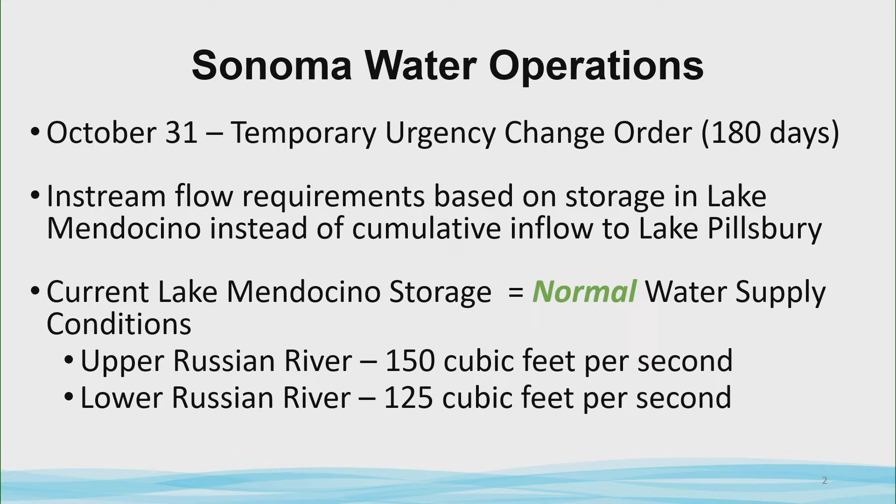So instead, more correctly, they utilize the storage in Lake Mendocino during this time. No surprise, there's plenty of channel inflow going into the Russian River right now, so they are operating under normal conditions for the water supply this year. As of today, that gets revisited every month under the order, which requires that they maintain 150 cubic feet per second in the upper Russian River and 125 in the lower.

In terms of storage in Lake Pillsbury, as of today there is about 64,500 acre feet of storage, well above their target storage for this time of year. They continue to operate under the same conditions they've been operating under the last few years, as you can see, with the exception of the blue line there, which was 2019.

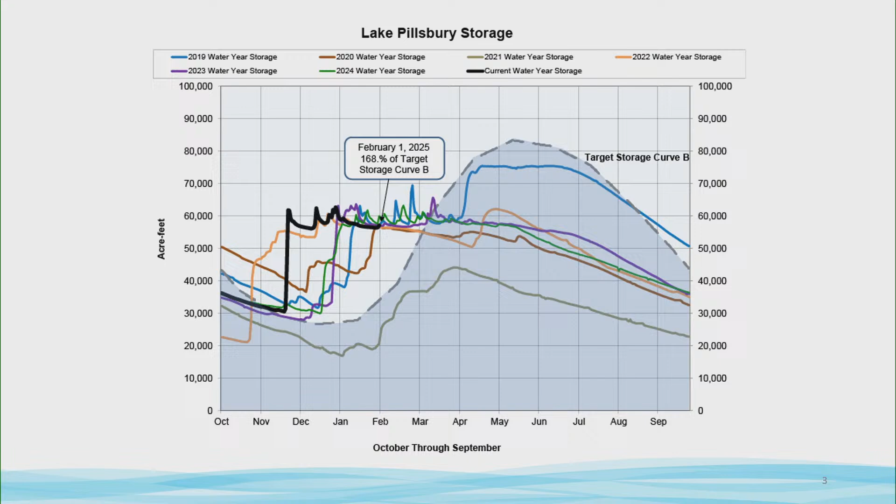For the past several years, they have not been able to operate the slide gates, which would allow them to store an additional 20,000 acre feet of water in the spring. You can see the curve changes there in terms of the target storage supply curve, related to some seismic issues at that dam that have changed their ability to store that water. So we don't expect any additional water being stored there beyond the levels you're seeing at a maximum today.

In terms of Lake Mendocino, storage again is well above the forecast informed reservoir operations pool. As of today, they are seeing storage of about 90,800 acre feet. That, of course, means the Army Corps has taken over decisions a while ago, dating back to the end of last year, in terms of managing releases for flood control purposes.

They made about 24 hours of releases on the 31st last week, and it's very likely they'll again manage releases in both Lake Mendocino and Lake Sonoma this week, later on, probably this weekend as well. So expect that they're going to have to draw that back down to get back under that flood control storage pool level.

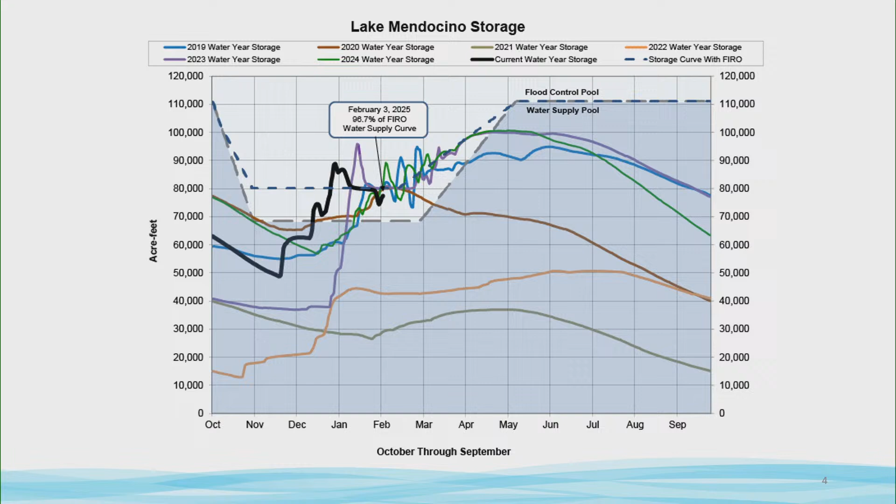Lake Sonoma, where we get our water supply, is also very, very full. Notably, if you look at the top dotted line, later on in March, or towards the end of this month, they'll start being able to store additional storage, up to a maximum amount of 19,000 acre feet. They're already pretty close to that. As of today, they're at 284,500 acre feet above the FIRO storage pool. So again, it's likely they'll have plenty of opportunities to maximize carryover storage this year as well.

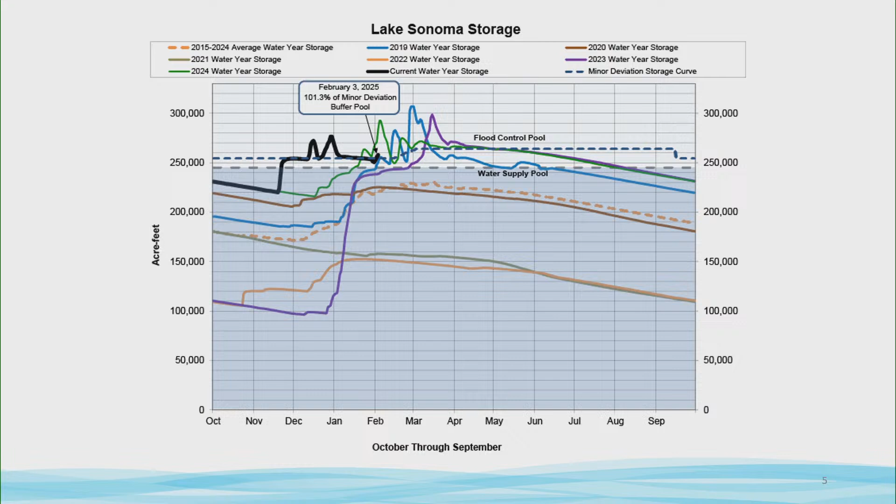I wanted to highlight a substantial outreach effort we're doing right now, a regional effort between the Sonoma-Marin Saving Water Partnership. We kicked off the Dye Tab Challenge, which runs through March to coincide with Fix a Leak Week. We'll be sending out bill inserts, and there's already lots of social media that's kicked off. Essentially, we're asking customers to take the Dye Tab Challenge, where they request dye tabs to test for leaks in their toilets, and they can enter to win a $25 gift card.

This is an outreach effort project going on amongst all the partners in the Sonoma-Marin Saving Water Partnership, but Santa Rosa is participating as well, and we've done this in the past and gotten quite a few opportunities to partner with folks on fixing leaks in their houses, so it works.

Just to provide a good news update on our grant-funded programs for direct install of ultra-high efficiency toilets, we're getting close to 100% completion of the phase 1 project, funded through the budget process in 2022-23 from the state. That was a $1.5 million ask that we received for the program.

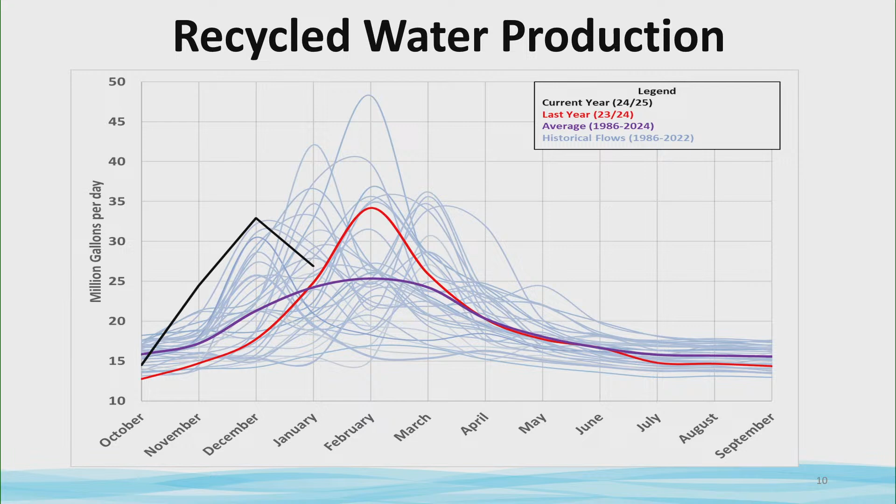Due to dry weather for the month of January, plant flows have dropped, but with this recent rain event, we expect flows to increase to 40 to 50 MGD range. This increase in production is caused by the wet weather we have had since the late fall of 2024.

This next slide is a recent snapshot of the recycled water curve. As a reminder, the red line is this year's storage level as of October 1st, 2024. The gray line is the average levels, and the black line is last year's levels for comparison. This year we received significant rainfall in a short period of time, so this has increased our storage levels about 300 million gallons above average for this time of year.

With storage levels very high for this time of year and with more expected rain, staff have decided a discharge, which I will discuss later in the next few slides.

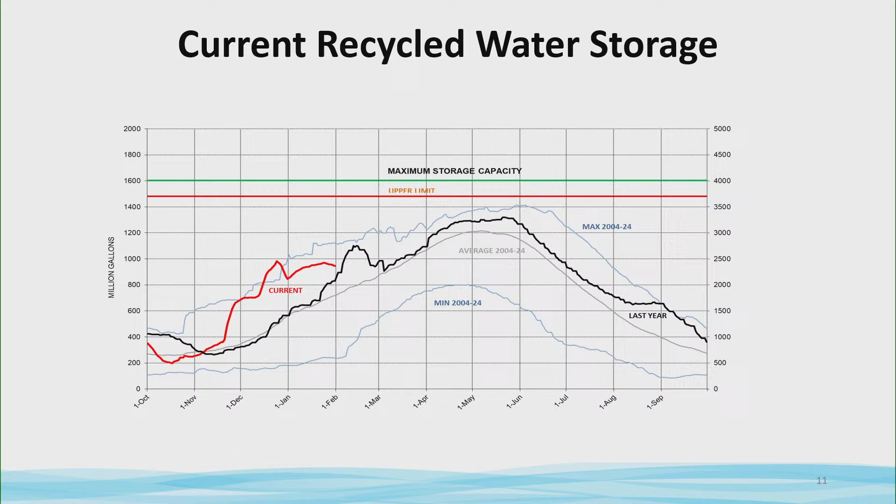This graph shows our discharge trend. We don't have all the data available for this water year's expected discharge shown in the gray because we are still in the middle of winter. However, we are currently discharging another 300 million gallons.

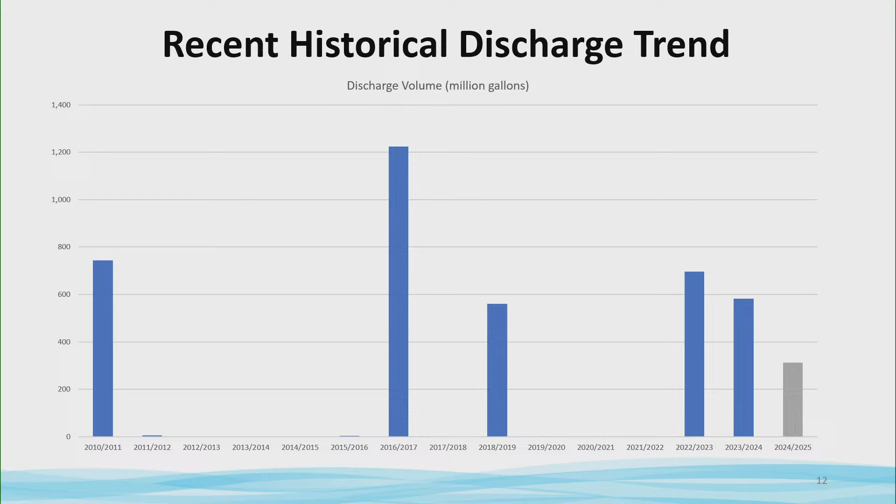This is in addition to the 300 million gallons that we discharged in the end of December 2024. Therefore, we expect to see the gray bar reach the 600 million gallon level on this graph. Furthermore, the last 3 years have had significant rainfall, which has led to discharges, but this is great for the overall region.

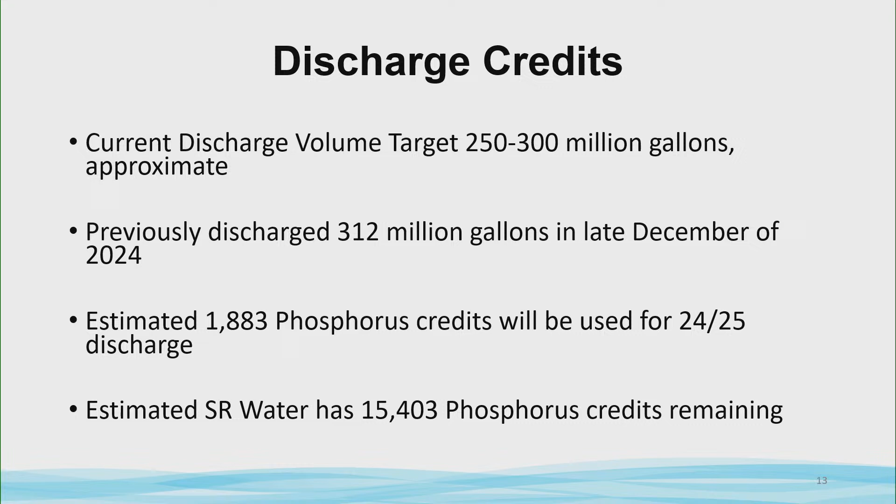Yeah, we need the 2 feet of freeboard. So our upper limit is our operating level, and the max is the max - that's where we don't want to be, because that's where you could spill over the overflow. Thank you.

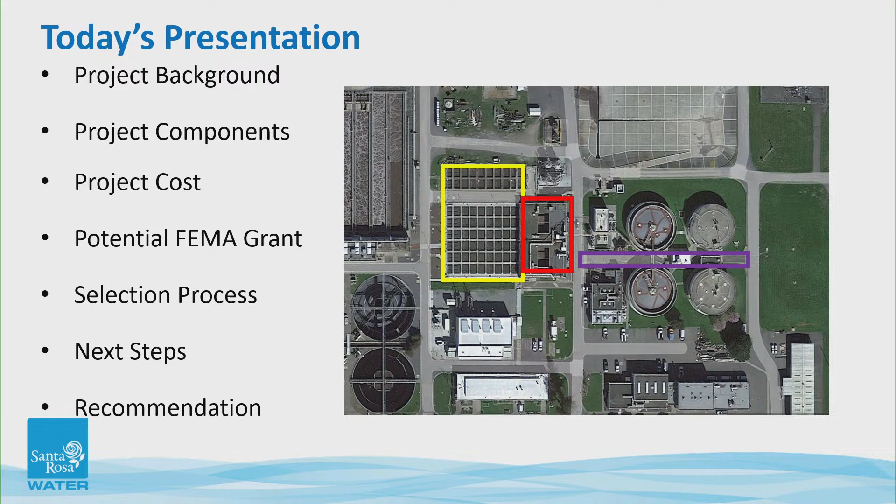So for the project background, I'll go over the headworks function and what the project is about. Our regional treatment plant treats wastewater from Santa Rosa and regional partners. The treatment process starts at headworks, where all flow enters the facility via collectors at approximately 40 feet deep.

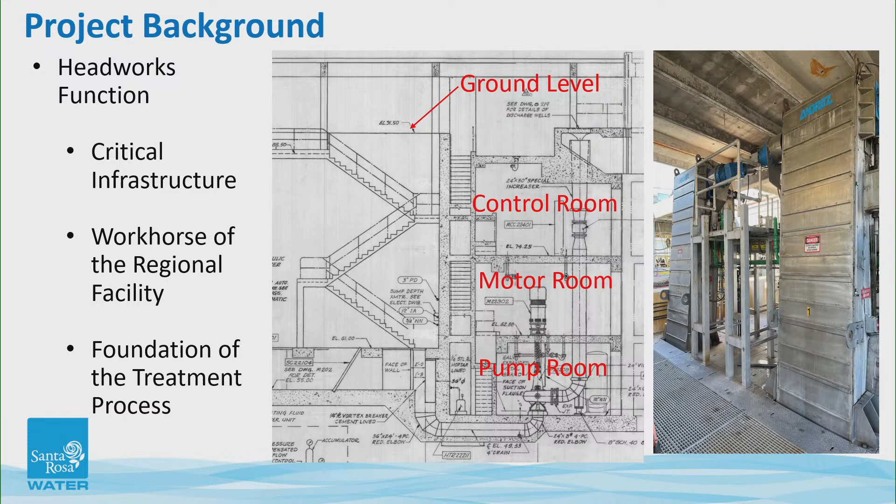As you can see, the headworks is a very critical infrastructure. It is the workhorse of the regional facility and the foundation of our treatment process.

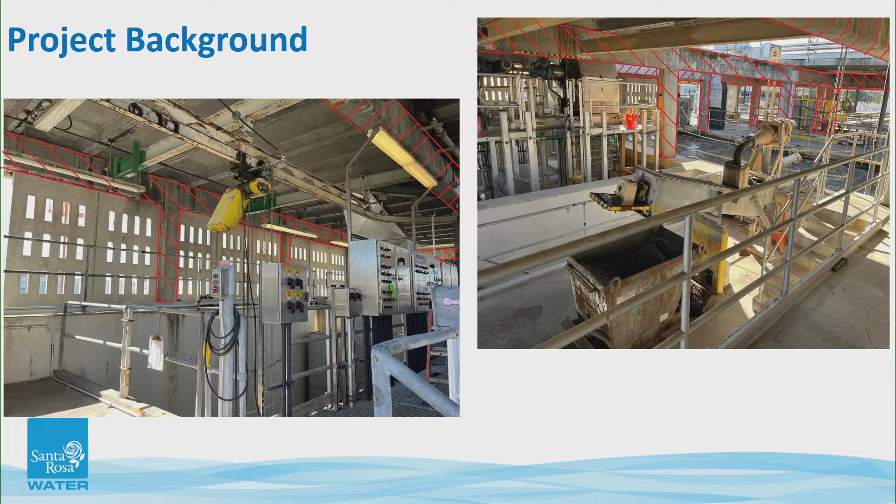Continuing with the headworks overview, the pictures on the slide depict a portion of the headworks ground floor, which houses various mechanical and electrical equipment. The red hatches emphasize the concrete superstructure surrounding the equipment.

Now we'll dive into the structure deficiency and the project approach. As seen on the previous slide, the headworks facility is surrounded by at-grade superstructure comprising concrete beams, columns, and roof panels.

Due to exposure to corrosive gases, concrete and metallic components of the structure and equipment within it are deteriorated and have reached the end of their useful life. In addition to structural concerns, the equipment is located nearly 40 feet below grade and is very difficult to access and properly maintain. Also, the design of the headworks is outdated, and equipment is vulnerable to flooding if surrounding channels fail due to an earthquake.

The city partnered with Hazen and Sawyer in 2022 to perform seismic loading and structural condition assessment and find alternatives to improve the reliability and safety of the headworks superstructure. Due to significant deficiencies and structure degradation, full replacement of the headworks is needed, but due to the $300 million cost, it is not feasible in the near future, so we looked at other alternatives.

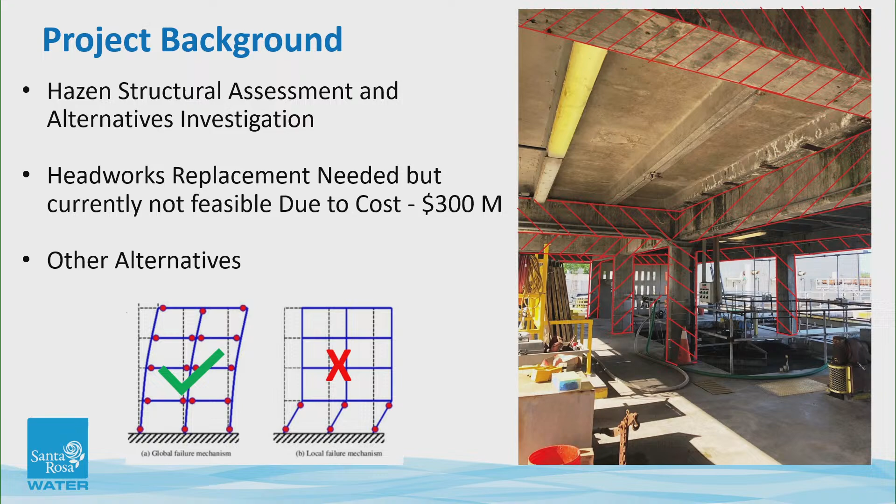I'd like to bring your attention to the picture on the right. If you look closely, you can see that the column exhibits signs of concrete degradation due to cracking. This is one of many examples of failing concrete in the superstructure. In order to temporarily retrofit the existing structure, 4 alternatives were developed and evaluated.

The alternatives were: superstructure demolition and equipment frame construction, at approximately $12.7 million; pre-engineered metal canopy, $17 million; tent canopy, $15.5 million; and carbon fiber wrapping, $3.7 million. Please note that all costs on these slides are in 2023 dollars.

Alternative 4, carbon fiber wrapping of existing columns, was chosen due to the lowest cost and meeting the need to improve seismic reliability before a new headworks can be built to replace the existing one.

Now we'll dive into the project scope and components. As we saw on the previous slide, carbon fiber wrapping was chosen for the design. In addition to the lower cost, it does not require equipment relocation or structure demolition, and it minimizes the impact on operation. Once the design starts, the consultant will perform a finite element analysis for the concrete moment frames and design of the wrapping system.

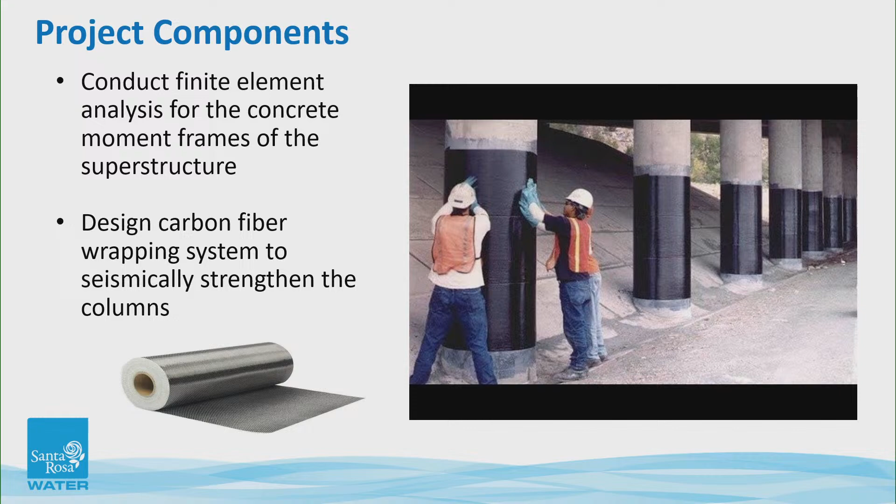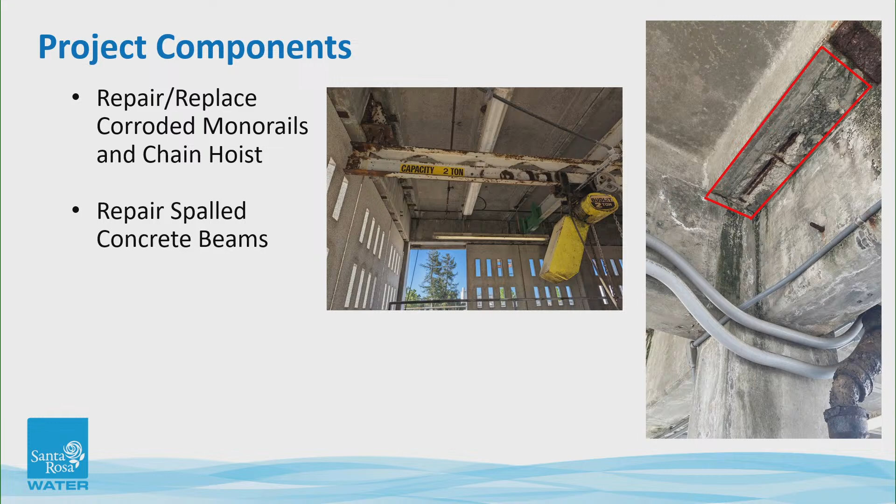Now we're going to talk about primary sedimentation tanks and digester gallery. Unfortunately, due to the age of the treatment plant, damage to the concrete is also present in other critical infrastructure, such

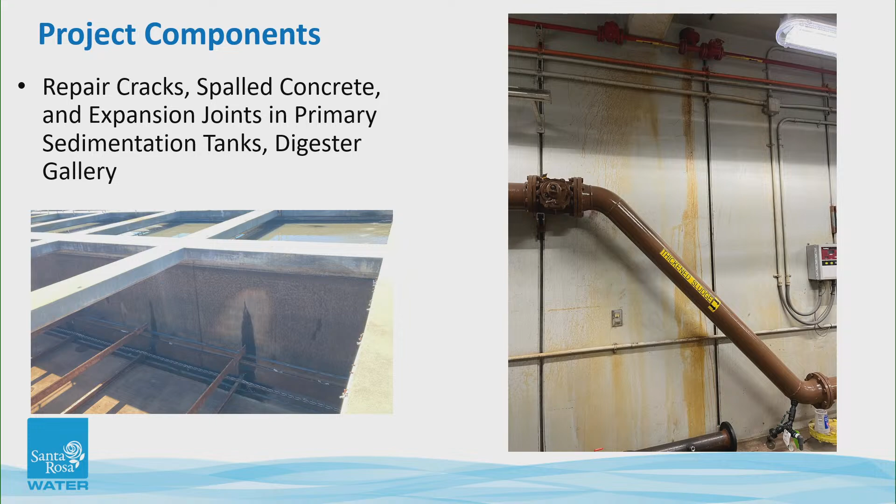So moving on to discuss the project cost. On this slide, all costs are in 2025 dollars. The main objective of the project is retrofitting the existing columns with carbon wrapping, with a design cost of approximately $314,000 and a construction cost of $5 million.

A portion of the cost of this project component is potentially going to be reimbursed by FEMA, and I'll go over the FEMA process on the next slide. The other components of the project are monorail rehabilitation, primary sedimentation tank concrete repair, and digester gallery concrete repair, with associated design cost of approximately $43,000 each. The construction cost of all 3 of those components is $2 million.

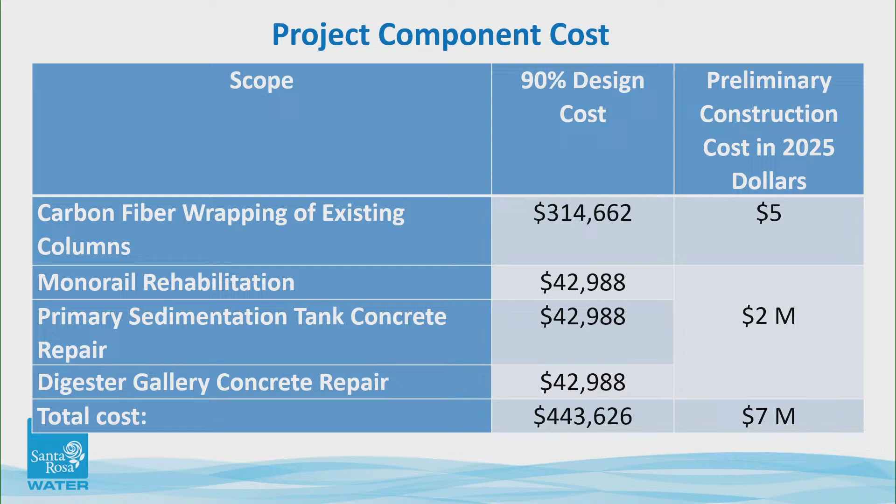Please note that even though those costs will not be reimbursed by FEMA, it is critical that we repair all 3 components in order to extend the concrete structure's useful life. To summarize the project cost, the design cost of the whole project is approximately $443,000, and the construction cost is $7 million.

So let's talk about the potential FEMA grant. The city has applied for a FEMA hazard mitigation plan grant. Since Cal OES recommended the project to FEMA for further review in September of 2024, the preliminary results of the approval process are considered very promising.

In order to award the grant, 90% design documents are required to be completed, per FEMA. Therefore, the scope of the professional service agreement includes development of 90% design documents. If the grant is awarded, FEMA will fund completion of the design from 90% to 100%, and at least 75% of construction cost. In which case, a contract amendment with Hazen and Sawyer will be pursued in the future for the balance of the design.

So to summarize it all, the grant will cover at least $3.8 million of the total project cost. Unfortunately, the grant award timeframe is not known at this time.

So now we'll switch our discussion to the consultant selection process. The project was advertised on September 17 of 2024 with a due date of October 14. One proposal was received, from Hazen and Sawyer.

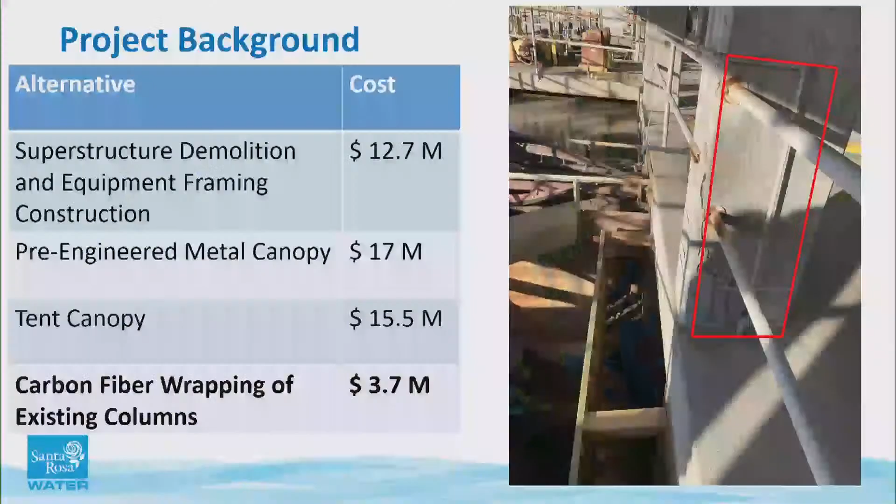Mr. Chair, members of the board and staff, Mark Solomon with Hazen and Sawyer. Good question, very good question. It's hard to give an exact answer, but certainly the carbon fiber is anticipated to last 10 years or more. The tent canopy is probably similar. The pre-engineered metal canopy will vary in terms of its lifespan, but this would be a fairly low-end type canopy, so its life would probably be more than 10 years but less than, probably around 15 years or so, plus or minus. And then the first item up there, hard to say. That's where you're taking the structure down and just putting some temporary supports in there to support equipment that's on the roof, so that probably has a life of 10 years or so, plus or minus. So very similar in terms of their lifespan. Probably the pre-engineered metal building has the longest lifespan. Okay, thank you. Sure.

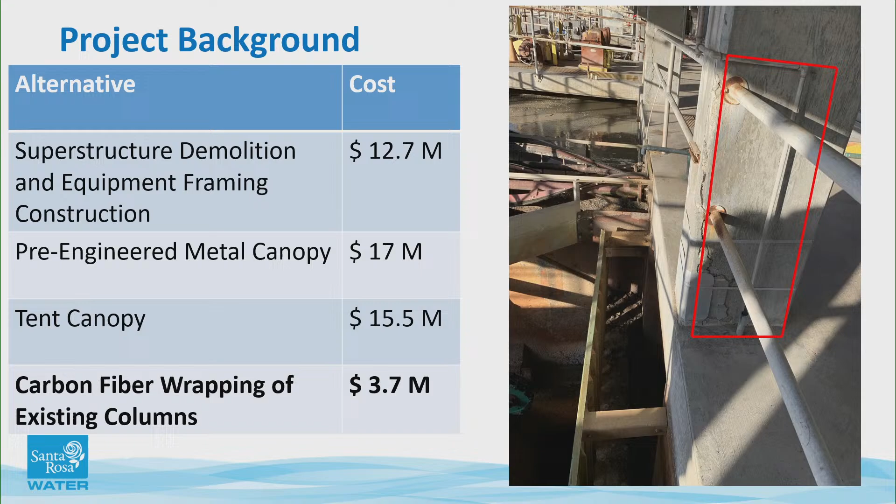Yes, please. Go ahead. Yes, thank you for that presentation, and I appreciate the efforts to make this as helpful as possible as soon as possible.

One of the dilemmas we face is finding money, and I was curious if there's been an effort to look for other funding sources should FEMA somehow have a different approach in the future. Is there state grants? Are there foundation fundings? Are there other monies out there that might be helpful to us?

I'm not aware of any. Through the chair, Board Member DeWitt: so this project, we are providing funding through our cash-funded CIP. If we are unsuccessful in getting the grant, we would look to ensure that we are going to find the funding. We are also looking at and preparing for a bond sale. There might be some excess bond proceeds, so we will fund this project regardless, depending upon, you know, if we're successful with the grant, which seems likely, we will fund the project.

No, we're good. If I may add a little bit, Deputy Director Mike Prins, Regional Water Reuse Operations. Through the grant application process, there was discussion about potentially getting some matching funds through, I think, a state program, but the fact that a portion of the sewer shed served by the Laguna Treatment Plant is somewhat disadvantaged or considered a lower economic population, we may qualify for additional funding along those lines, but that is more up in the air, I guess I would say. So there may be some other avenues for alternative funding. I don't have as clear a picture of where that is right now, but that would be, I believe, in addition to any FEMA-related grants. So that is hopefully going to come through, but we don't know.